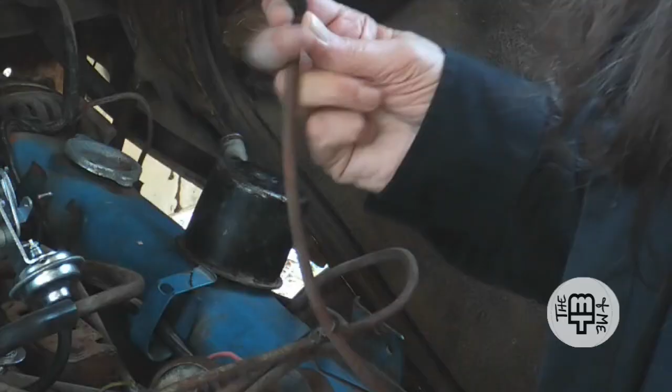So in case you haven't figured out what's orange and what's blue, this is what's orange - although they're awfully dirty, it's the old spark plug wires. And the blue ones are the new spark plug wires, and they're not dirty at all.

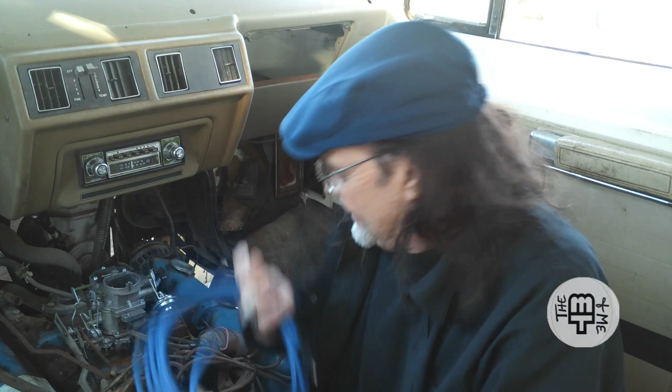And I got blue because that's Mopar color. If you look at my engine, the valve covers and even the engine block itself, where it's not all greasy and dirty and worn down, is a beautiful Mopar blue. This isn't exactly Mopar blue, but it's the closest thing I could find, so we're going to go with that.

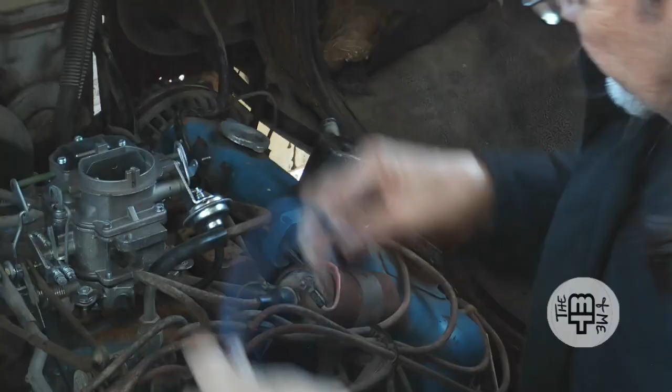Now, first thing right off the bat here is we have to determine what plugs go where and which wires go where. I think that is my coil plug, so it'll fit right in there. And we'll work out the others here in just a second.

But if I was looking over my purchase list - let's see, what have we got? Actually, this is not the purchase list, this is the to-do list, isn't it? I still have repair ignition wiring, and that's really a part of this. And we still got clean and replace the plugs and wiring.

Okay, the plugs are on order. They were supposed to be here in time for this too, but we're still getting some shipment delays, so they're a little late, and we'll change them out next time. But I do have the plug wiring, so I want to get started with it. That way, whenever the plugs come in, it's a simple matter of just swapping them out. So that'll take care of that.

We still got to check the starter - that's prime on the list. Get that checked and get a battery. Once we get the starter checked and get it back on, my next step is going to be getting a battery so that we can start actually troubleshooting the electrical system and see how it works.

And one other thing that I really want to do today is look back into the dash panel. If you remember, whenever we first took the panel out, we were trying to figure out what that fuel switch did and where that wiring went. And in the process of getting the dash instrument cluster out, I broke some of the pins in a little multi-pin connector that does a lot of the stuff like feeding the ammeter and the fuel gauge and stuff like that. Even supplies power to the lights that are in the panel that light up the dashboard at night.

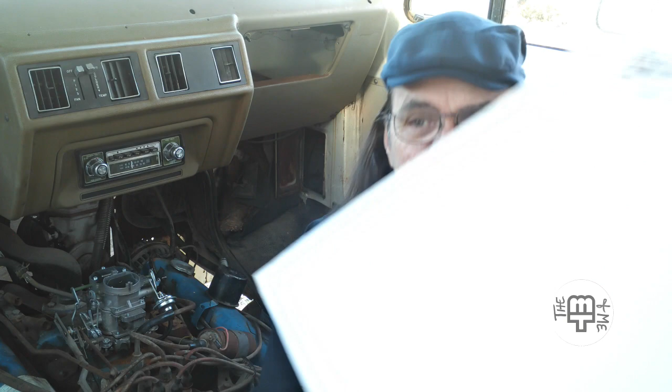We've got the spark plugs, and while we're at it, I do have the purchase list here, and we can mark off plug wires and spark plugs, because although the spark plugs aren't here, they're on the way. I've got it on good authority that they will be here. Probably, knowing me, they'll probably get here like a day after I finish this video. That's the way it usually works. So we'll do that next time around.

So that still leaves us radiator hoses, and here again I've shopped for them. I haven't actually ordered them, but that's in the near future as well. We'll get top and bottom radiator hoses, we can get those swapped out, and we can actually see about getting the radiator put back on, which means we'll have to put the fan belts back on the front and the fan as well.

Remember the fan? We spray painted the fan. It looks really nice, and it's just waiting to go back on. So we'll see how that works out, okay? In the meantime, there's still some other things we have to buy, but that's on down the road. For today, we've got spark plug wires anyway, and that is what we're going to swap out right now here on the MT and Me.

So I took my new plug wires and organized them here because they come in different lengths, since it's different distances from the distributor to the various spark plugs. I have one that's long, so my longest run has got to be it. And I would imagine that's going to be the plug on the front right side from the distributor.

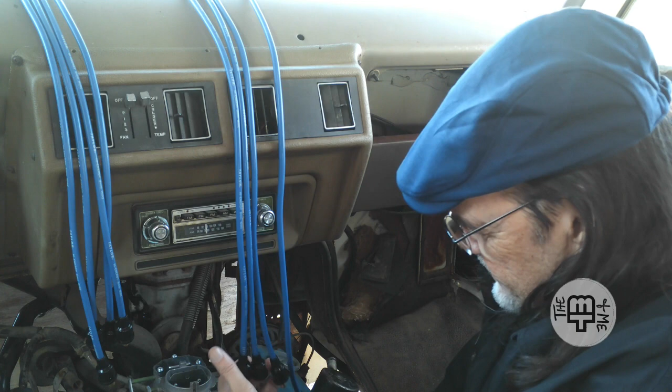Front left would be the next, so maybe it'll be one of these. These three are approximately the same length. This one's a little bit longer. And then I've got four over here. Three of them are just about the same length, and one of them is just a little bit longer. So it's just going to be a matter of experimentation.

Also, this kit included 2 coil wires. Now, the reason is it has a wire for a standard coil and distributor like this. If you have a distributor on a carbureted engine, that's just what they consider a plain old standard distributor. However, the newer fuel-injected engines have what's called an HEI distributor on them, and it's a little bit different, with a different kind of connection. Well, they also gave me a coil wire for that.

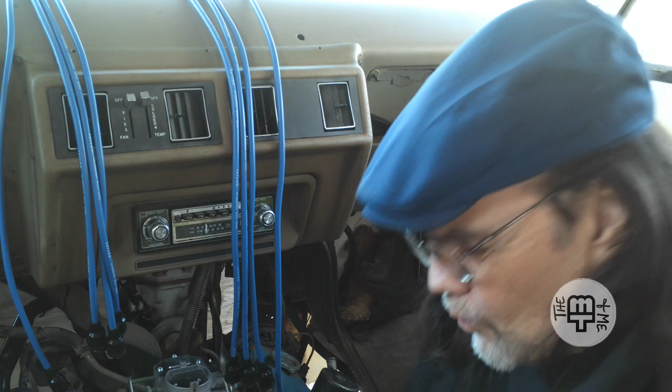Now, if you notice, all the other connections are going to be like this. The HEI connection is this. So it's just an extra wire to me, I'm not going to need it. I have a plain old distributor, and it's got identical connectors on it, and that'll connect the distributor to the coil.

Okay, so that being said, I guess we start pulling these wires one by one so I can be sure I keep the numerical sequence the same. Because although I have that referenced in my service manual, I'd just as soon not have to sit here and figure out what number 1 cylinder is and which connection it goes to on the distributor. Because if you mix that up, she's not going to run, or at the very best, she will run very poorly. So you want to keep that straight.

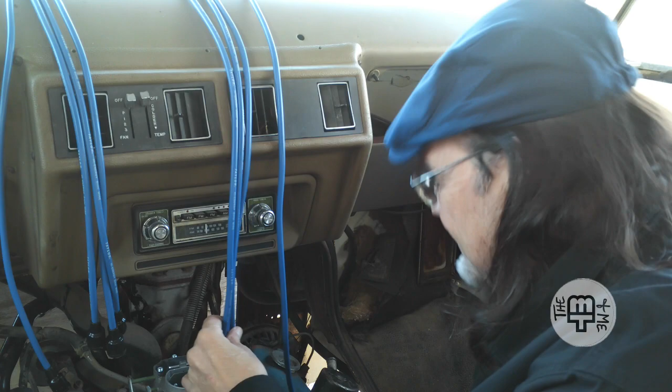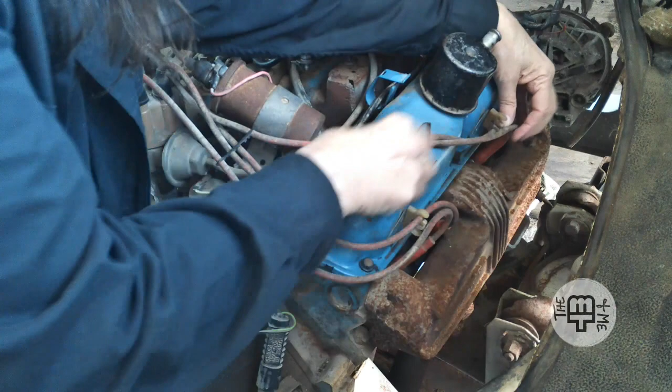So we will do it wire by wire, one at a time. And let's start with the longest one. Okay, the longest one is going to be this one right here. Let's get it out of the separator. And it goes to right here on the distributor.

Well, first of all, this wire is a lot longer than that one, but not much, so I'm hoping I've made the right choice. Let's see, let's get it on the spark plug. I'll worry about routing it later. Let's go ahead and plug it back into the distributor.

One down, and these are going to look nice. Okay, well let's just go sequentially here and take the next plug on this side. You can tell these are wearing out. Okay, and that goes to there. So, how about this one maybe?

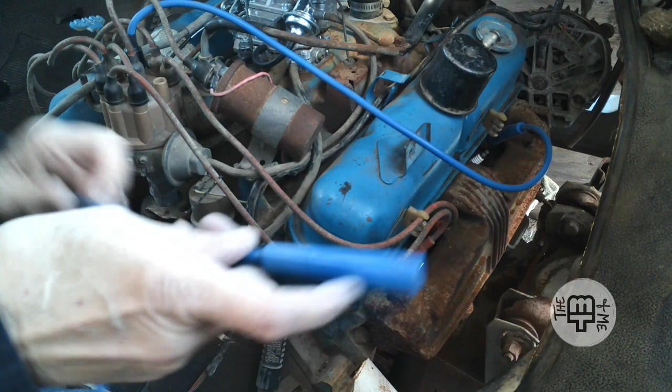I realize that there's a very good chance once I get down to my final wire or two, I'm going to have to do some swapping because they just may not fit. But we will see what we will see.

There's that one. I'm going to go ahead and get this coil connection off of here because it's kind of in the way. We'll get the rest of these fitted. Okay, now we have two more on this side, so let's go ahead and take care of them.

Didn't realize I put these old plugs on so firmly. Okay, this is a shorty. Close enough. Not too concerned about getting the plugs on real firmly since I'm going to change the plugs next.

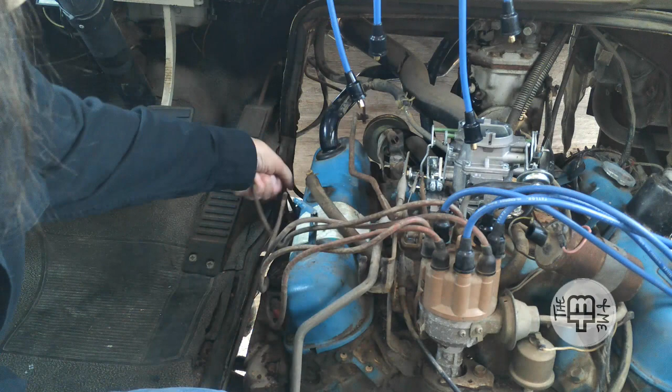Okay, we should be old hat at this by now. So let's start at the front, which I do remember is actually the number 1 cylinder on the engine, the front left. It goes right there. That's going to be our longest one here.

Which one is, well, take your choice, they're about the same. This one's a millimeter longer, so we'll put it on. It's not quite as critical on this side because this entire side of the engine is a little bit closer to the distributor. The distributor's not quite in the middle, it's a little offset to the left. So that was just barely in there. Okay.

I'm thinking maybe this one will go there as far as length goes, since it was next longest. Let's get our back two.

Selection gets easier when you get down to just a few wires left. This side is hard to access because of that heat shield. I understand why it's there, and I'm glad it's there, but it does get in the way when it comes to servicing your spark plugs. Our final plug is of course going to be difficult to get out. There, plug wire—not taking the plugs out, just the wires. Here's number 8, or maybe it's number 7. I don't know, it's one or the other.

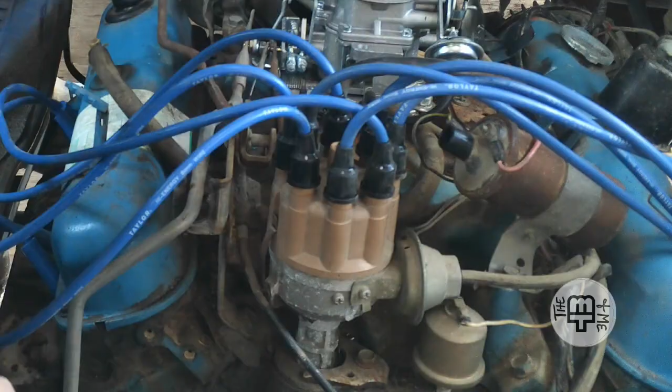Oh, before I go any further, we do need to plug the coil in. Plug that in the coil. And that one goes in the middle. And there we are.

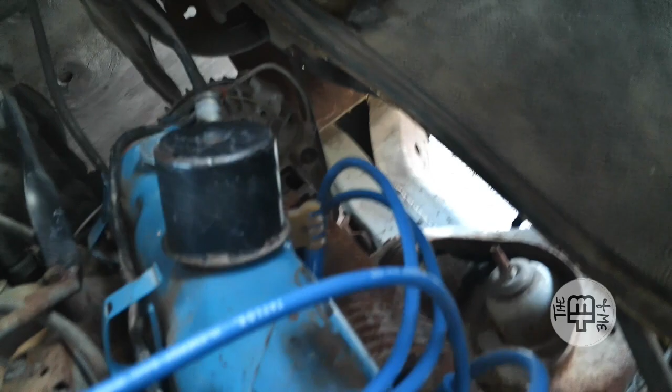Oh, they do look nice. Now the old orange wires were distinctive, I'll give you credit for that, and I'm sure when they were new, they really did look good as well. But they're not new anymore, and they're not really orange anymore. And I like this blue. I debated when ordering wires. I could have gotten—I never did find orange—but I found red, and I thought, well, red's my favorite color, so that would be cool. And of course there's black. Black is nice, but it's so ordinary. And then I thought, blue. Let's do blue. Since the motor's blue, we'll give her blue plug wires. And that's exactly what we've done. And I like them.

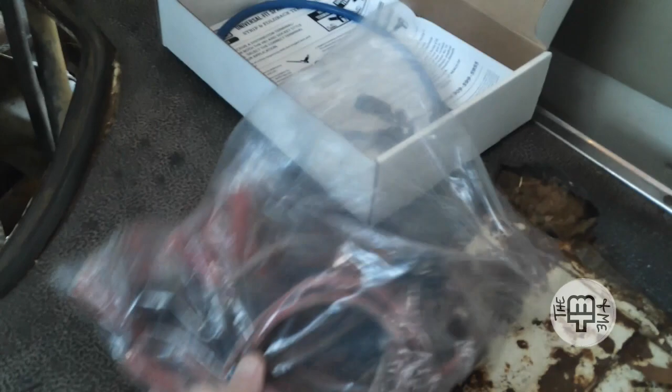I want to point out, I have bagged up the old wires, and I'll hang on to them, because it never hurts to have a spare, and these are probably still functioning. The wires, unless they get an actual break, don't necessarily quit working, but as they age, the resistance of the wire increases, and that can cause some problems in getting the spark delivered, okay?

I should also point out that with the wires came a nice little package of insulating gel. This is a waterproof gel that's non-conductive. It says dielectric grease—that's the technical name for it, dielectric grease, which means it is non-conductive and helps to seal out moisture. This is what you put inside your boots, on the connections around the distributor, and also on each individual spark plug, just to help keep moisture out, because moisture is the enemy of electricity, as always.

So there you have it—nice new blue spark plug wires on Pearl. The spark plugs are coming next, and we should have a new ignition coil as well coming next. We'll put that on in the very near future. So one more step in the wiring is complete. We've got our spark plug wires done. Soon we'll have the plugs and ignition coil, and we've got the carburetor installed and hooked up.

The vacuum hoses are done. Wow, we're just coming right along here. Radiator hoses will be ordered and installed. This is the old top radiator hose, so we'll be replacing it as well as the bottom one. And I'll check the heater hoses too—I'm not sure about their condition. They may need replacing as well. If so, no problem, we'll take care of it.

So while we're here, we can update our list. Alright, we had clean and replace plugs and wiring. And like I said, the plugs technically are not replaced yet. We have cleaned the ones we have, and we're about to replace them. So I'm going to fudge a little bit and go ahead and mark that off, okay? Because that's right next on the to-do list.

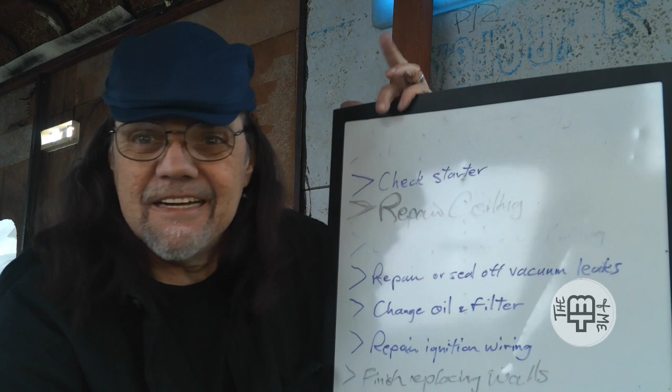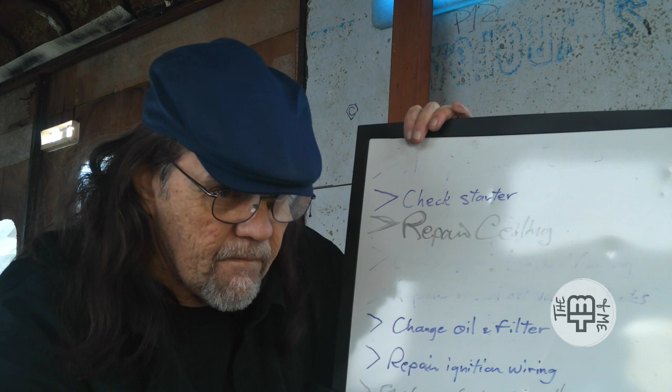I like that—repair or seal off vacuum leaks. Well, you may recall we did that a few weeks ago. And although we haven't tested to see if all the leaks are sealed off, we have repaired the vacuum hoses, and I think everything's going to work just fine. It appears that there are no open vacuum ports, except maybe for one that I'll have to do something about. So we'll look at that later.

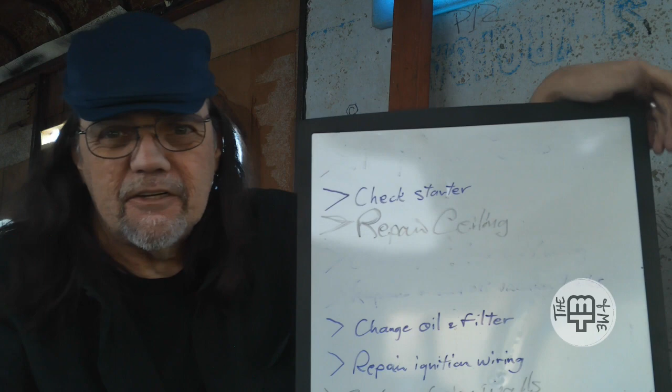Ignition wiring—jury's still kind of out on that. What we did today, I guess, would technically qualify as part of that if you look at the distributor wiring and spark plugs, and what we've done under the hood. You may recall the little plug that goes into the electronic ignition control unit, repairing that. That was a big part right there.

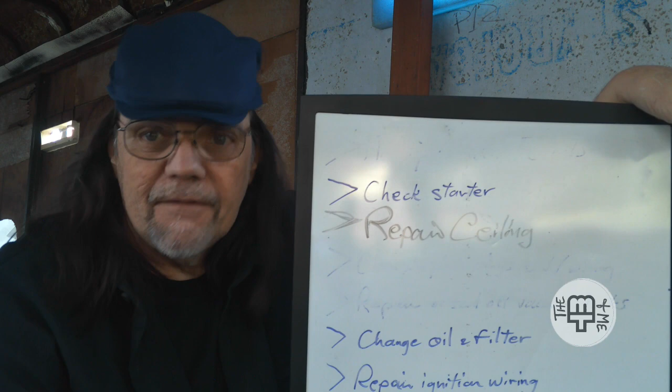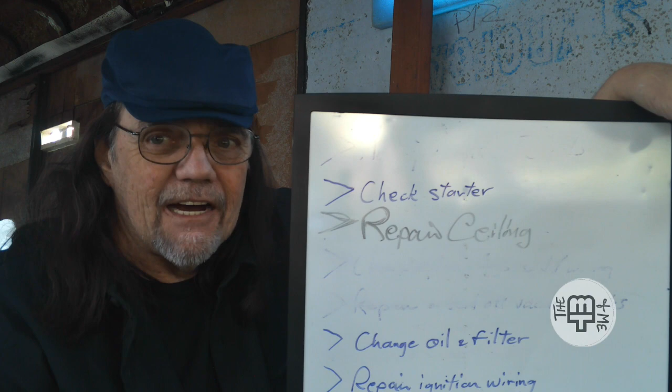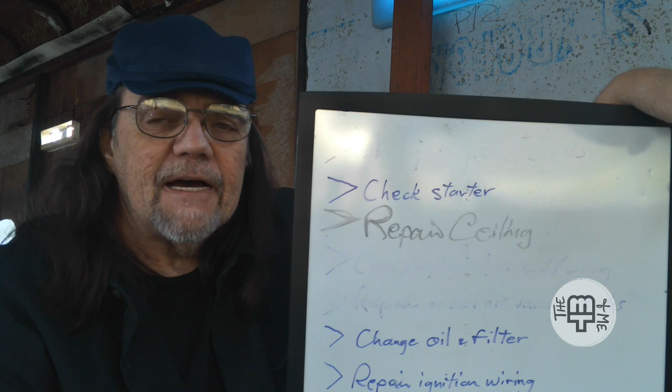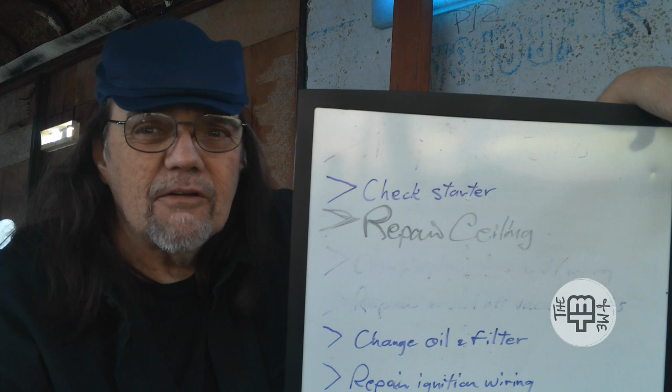We've also put new battery cables in, so that's a big part of that as well. There's still a couple of wires that I've got to trace down that I want to check out. I also am preparing to order a new ignition module, the control module, as well as a new voltage regulator and a new ballast resistor for the system as well. Here again, all of those items might be okay, but replacing them is not going to hurt. They're not terribly expensive, and they are readily available for this model. So I'm ordering them, going to replace them just to be on the safe side.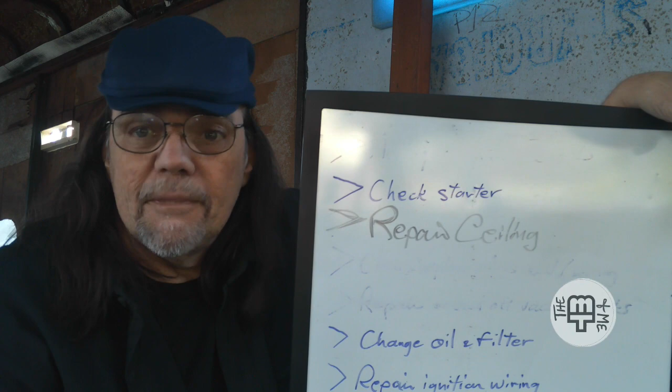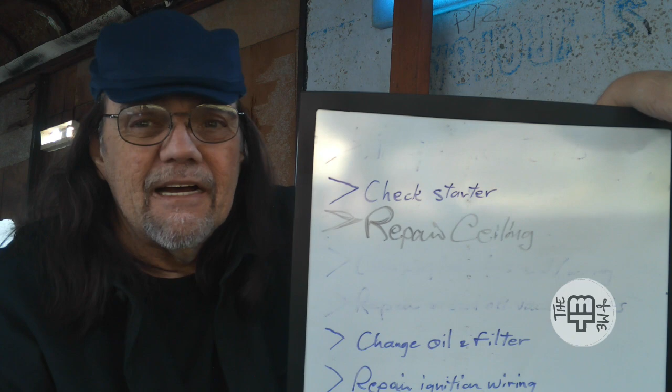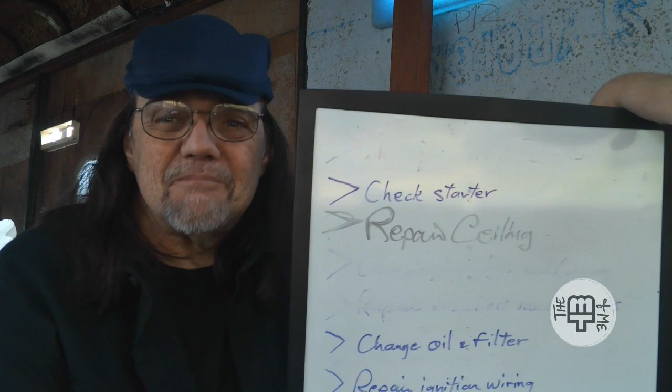We've got a purchase of a battery in the near future, and once we get the motor turned over, we'll be able to determine if the alternator is in good condition. If not, that may be another candidate for replacement, but I'm not going to jump ahead and replace it unless it's absolutely necessary. We'll replace the voltage regulator, and if the alternator works and we're charging the battery, everything's good. That'll all be checked out at a slightly later date.

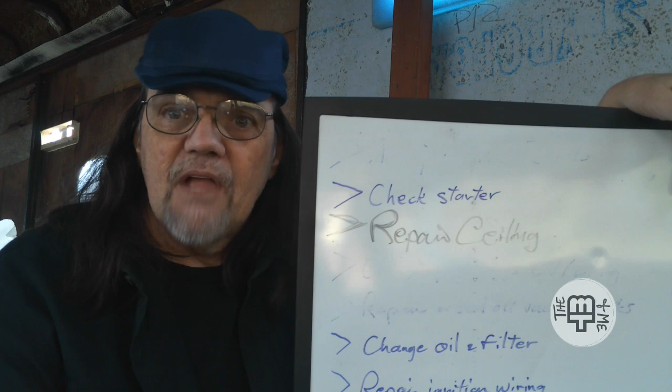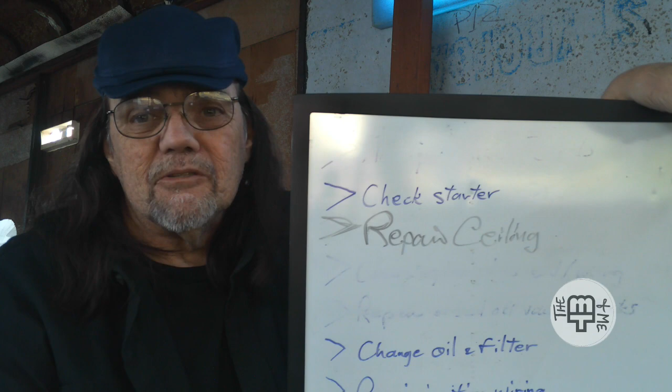The other thing we need to do, we have the starter off. I still haven't gotten it checked because I've just been lazy. I'll get that checked, and if it checks out, we'll put it back on Pearl and have it ready to go. If there's a problem, we'll either have the starter rebuilt—we have a good starter shop right here in town, one of my old classmates runs it—or I can do it myself or just buy a replacement.

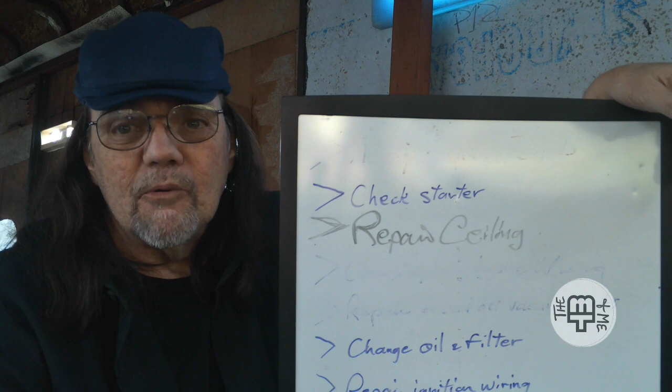So, more progress, more progress, and a couple more things off the list, at least as far as getting the engine running. As I've pointed out, that's my focus here in the first part of the year—get her motor running, not necessarily get out on the highway just yet, but have her ready to go. Once we get the engine running, we'll start focusing on other things, like the structural problems. We still have a leaky roof, and that's going to be the prime consideration next—getting the roof fixed, and then deciding what we're going to do about the outer and inner walls. There's still a lot to do, but I'm pleased with the progress so far.

Now, the one more thing I want to do today is pull that dash panel control unit out and look behind it once again, just to refresh my own memory about what I tore up when I took it out before and what I'm going to have to do to fix it. Not sure how much of this you're going to be able to follow, but we're going to pull this out.

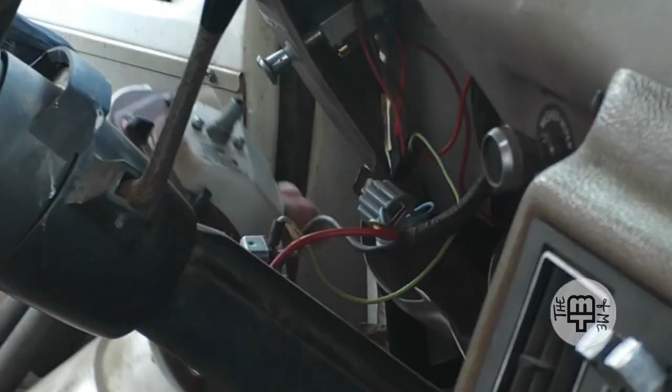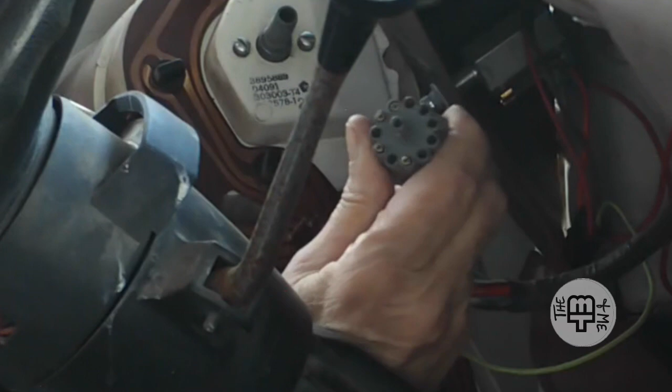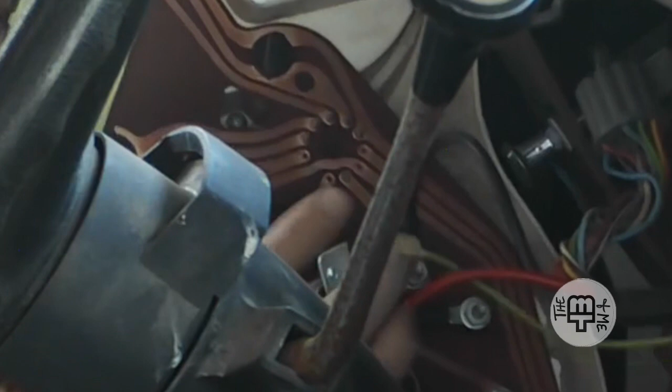This is the plug I'm talking about. There are 4 pins that stayed in it whenever I pulled it off the board. It goes right here, and hopefully you can see the places where those pins need to reattach. Now, I can probably get them out of there, but getting them soldered back in place on the PC board—well, that might be another trick altogether. But you know what, I'm going to give it a try.

Not right now, not today, but it's definitely something I can take a shot at. Now, the other option here is to find another 1977 Dodge van. This is a B300, but a B300, probably a B200 or a B100, will all have the same instrument cluster. If I can find one in a junkyard and pull the cluster out that still has an intact connector, then maybe I can swap them out. That's the other option. I'll try fixing this one first, and we'll go from there.

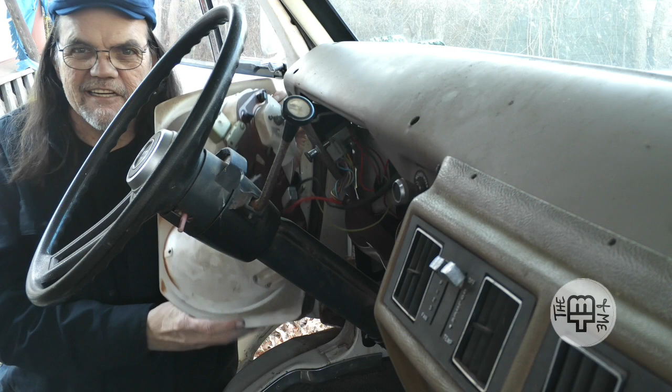I could pretty well slap myself for pulling those things out, but here again, I really didn't know what I was getting into whenever I pulled it out. Now I do—hindsight's always 20/20, as they say. So we're going to set that back in place for now, and I'll start practicing up on my soldering skills. You've seen me do that in my day job, so maybe I can handle it. We'll see. It's just one more thing.